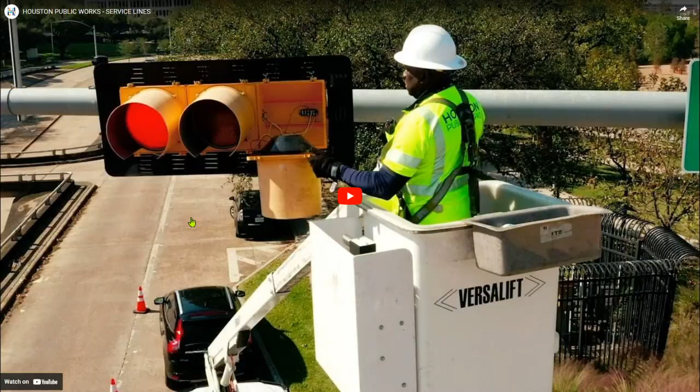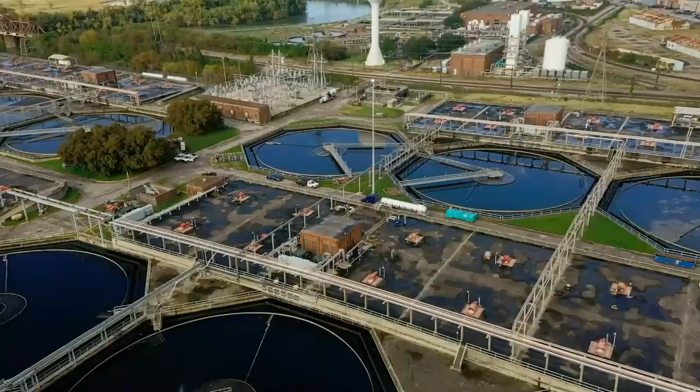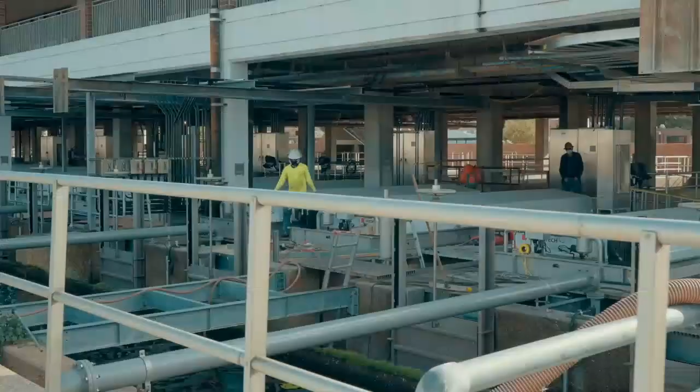Houston Public Works is responsible for the daily tasks you may take for granted. You may not notice us, but we work around the clock to support you. We are the foundation for life in Houston.

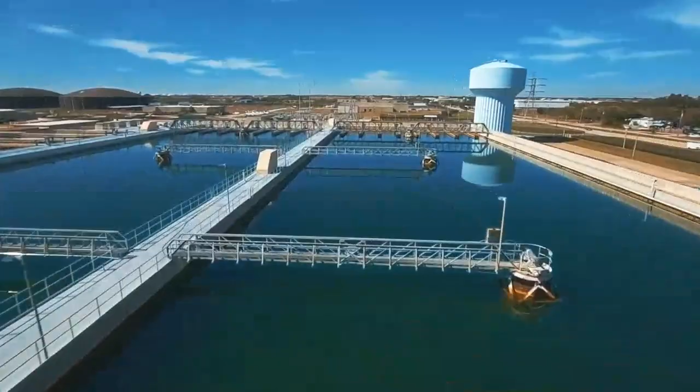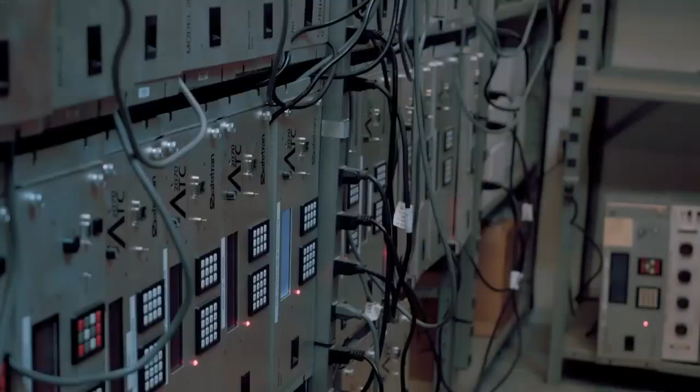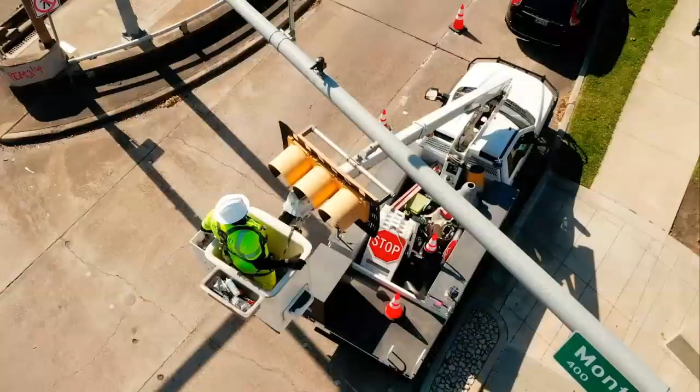Houston Water distributes enough fresh water to fill the Astrodome 4 times a day. Transportation and drainage operations handle 16,000 miles of streets, over 1 million signs and street names, and thousands of drains.

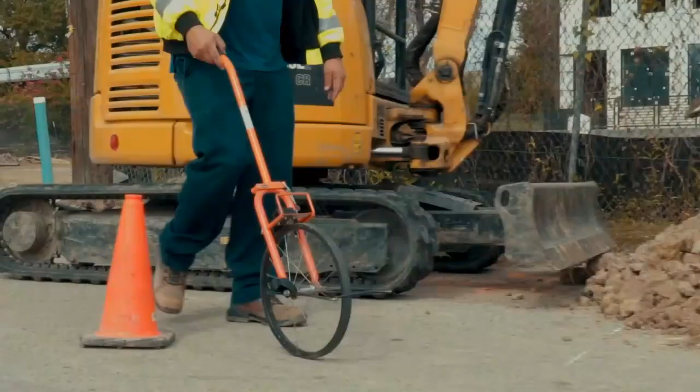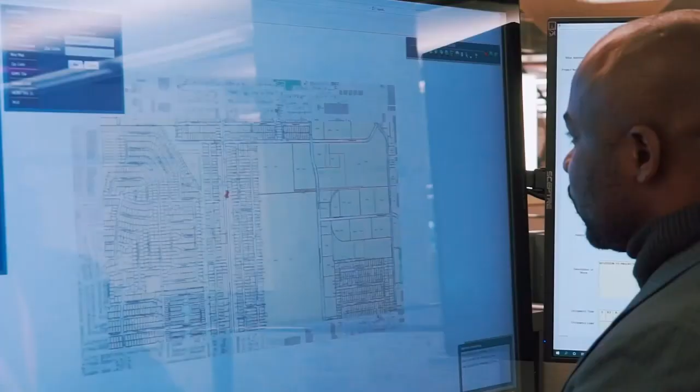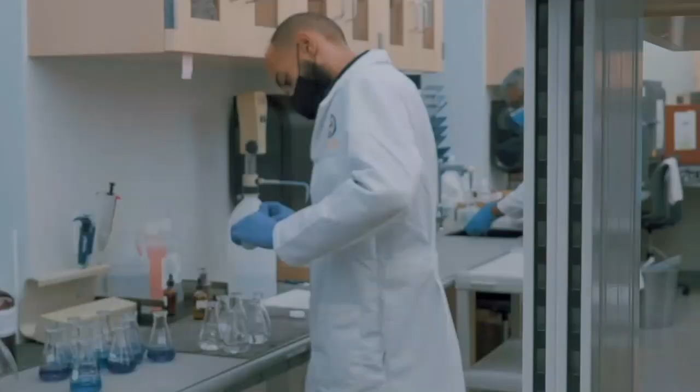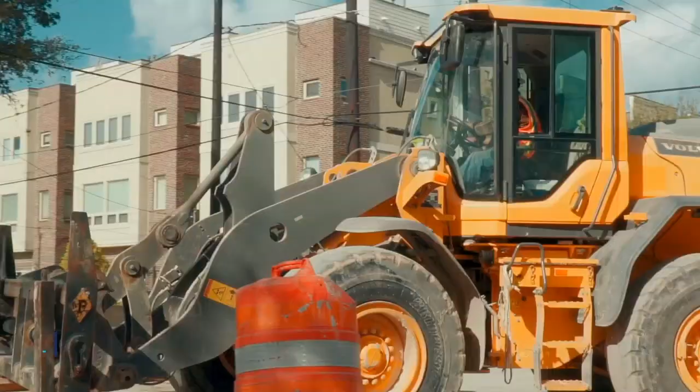The Houston Permitting Center regulates hundreds of projects so you can work, play, and live safely. Customer Account Services ensures 2.1 million people have access to safe drinking water with efficiency, accuracy, and flexibility. Capital Projects manages the critical improvements that make Houston better every single day.

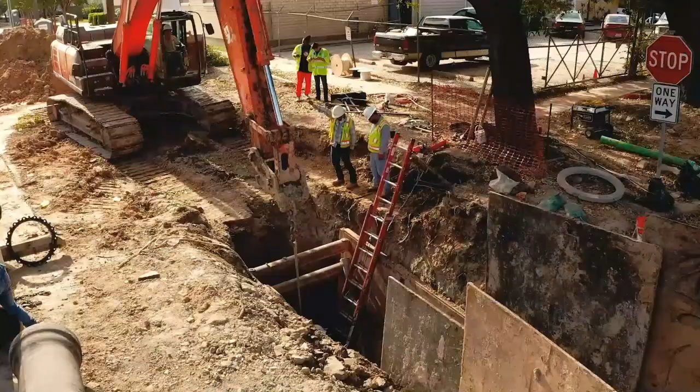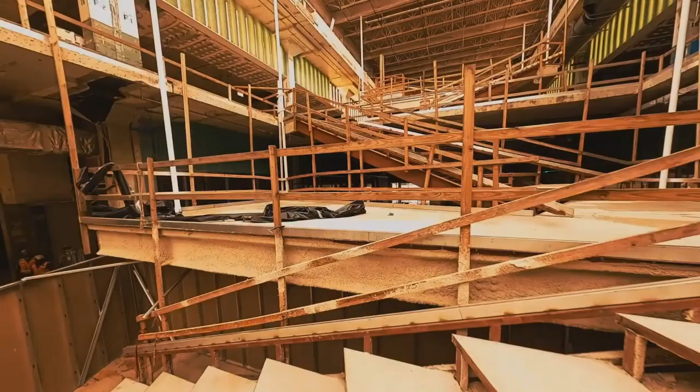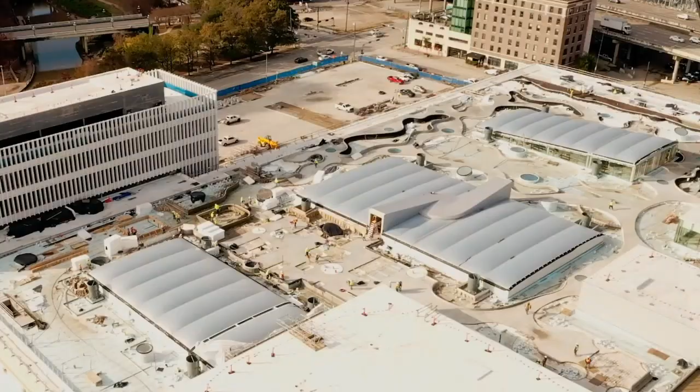Houston is always moving towards growth, innovation, and progress. We are the largest, most diverse public works organization in the country. We are one team with one purpose. Together, we create a strong foundation for Houston to thrive.

The goal of today's meeting is to keep you informed and know what to expect during construction of the Crenshaw Road from South Shaver Street to Allen Genoa Road Reconstruction Project.

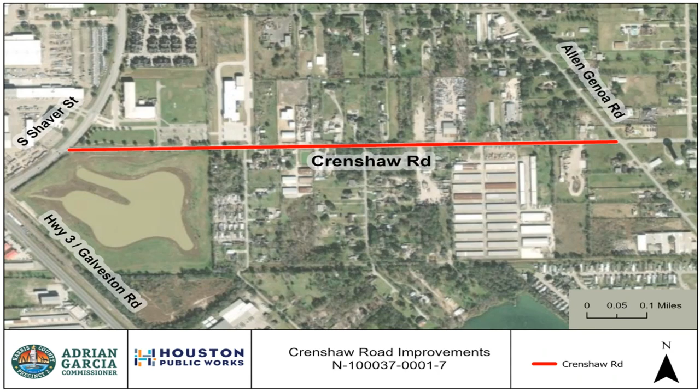There are 4 phases to this project. Phase 1 in red starts on June 12th. Phase 2 in yellow starts on June 19th. Phase 3 in green begins on June 26th. And the last phase, Phase 4 in purple, ends on July 9th. These phases are subject to change.

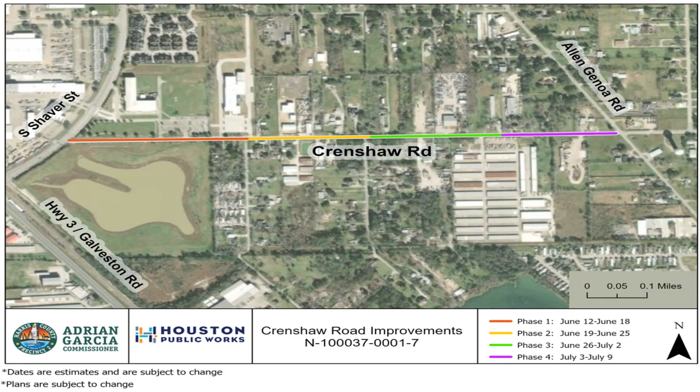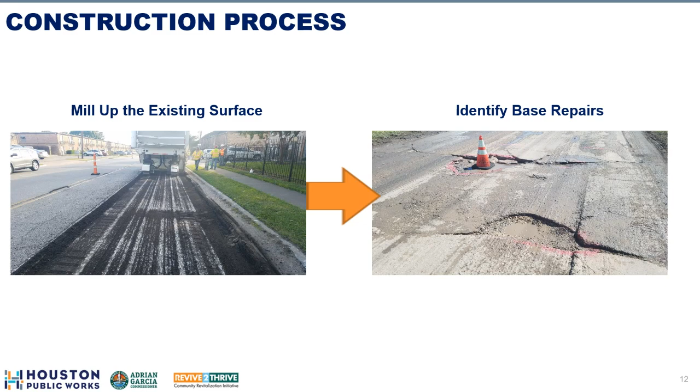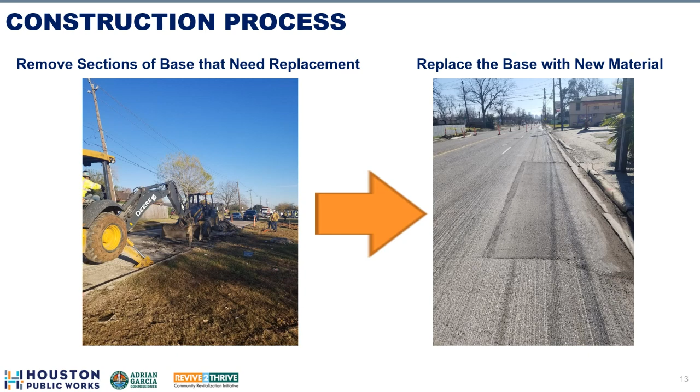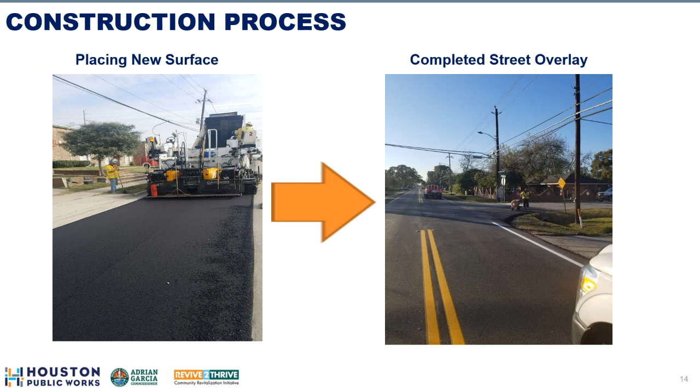What should you anticipate during these construction phases? Our advice is to organize, don't agonize. If you prepare for construction, the time it takes to complete the project will fly by.

If you have objects in the right-of-way, please remove them now as soon as possible. If you have specific landscaping you would like saved, we suggest you relocate such plant matter now.

Meet the project team. This includes the contractor, the inspectors, and the project managers. They are the boots on the ground every day.

The contractor also has a restoration plan for all properties. Once the project is complete, the contractor is required to restore the impacted area to city standards. Please do not make repairs yourself.

We recommend that you document current conditions by taking pictures of your property in the right-of-way area near the street and curb. These pictures should resolve any questions when it comes time for the contractor to repair or replace any items. Please be aware and obey all construction signs and barriers.

Safety is priority number one for everyone involved in this project. For your safety and ours, please pay attention to the following safety objects shown here.

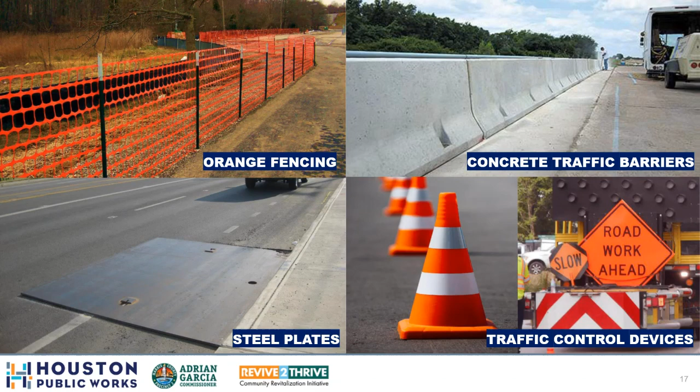We encourage you to go to engagehouston.org to view more project details. The project page includes additional project details right at your fingertips. Now a brief demo on how to navigate your way on engagehouston.org.

Welcome to engagehouston.org. We're incredibly excited to share this platform with you. This site allows us to communicate with Houstonians about the changes happening in their neighborhood. Our goal is to make the site visually fun and engaging, as well as easy to navigate so that everyone can find what they need.

Using the Google Translate option, users can translate the languages used on the website. On the home screen, you can navigate the 4 project types that we support: drainage, street, wastewater, and water projects.

Another great thing about this website is that we have enabled social media shares. Users can share meeting links, project pages, and updates to their social media feed through private messages and/or email. This helps us get more information out to the community.